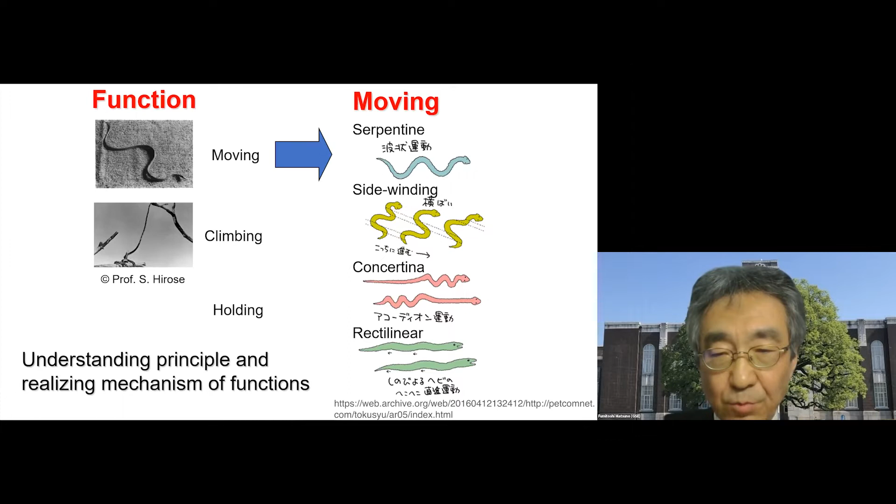Let us consider bio-inspired robotics. First, we consider snake locomotion. A biological question is why a snake can move without legs. Living snakes have many functions, not only moving, but also climbing, holding, and so on. In moving, it has many locomotion patterns, for example sidewinding, serpentine, and concertina. Understanding the principle and mechanism of these functions is very interesting.

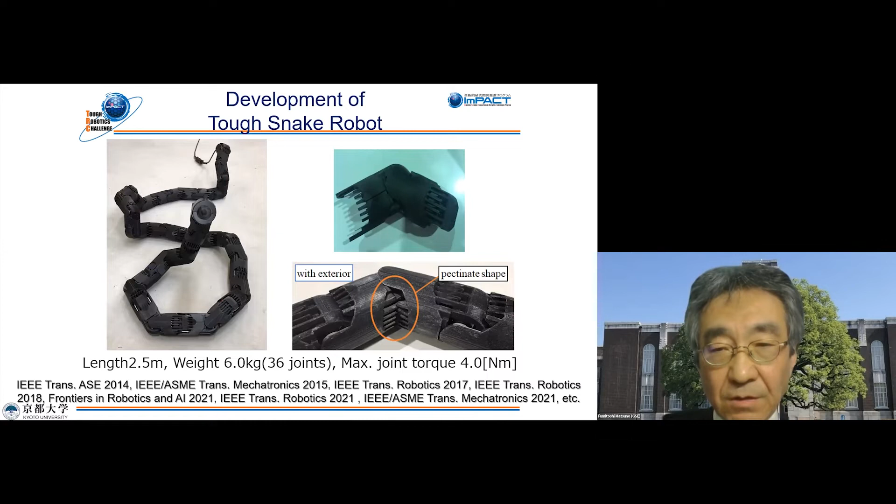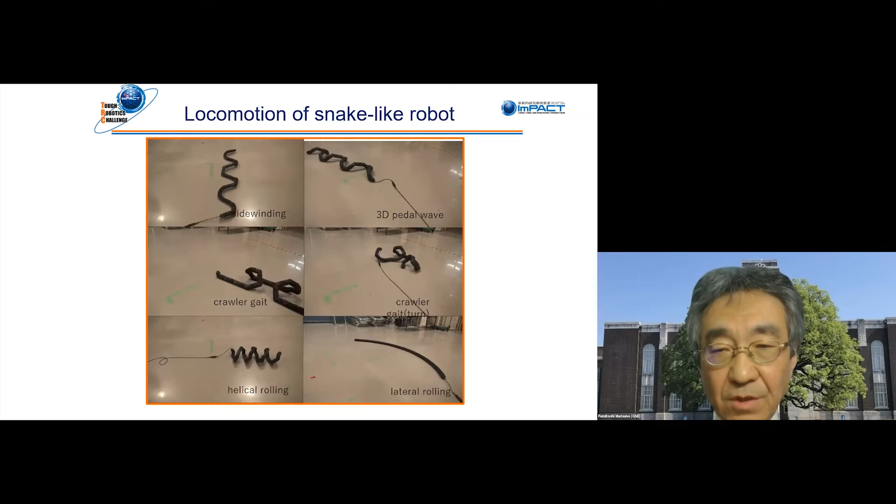We have developed some snake-like robots. This is a tough snake-like robot developed in 2019, and our developed robot has many locomotion modes. This is sidewinding, like a living sidewinder, and the other five locomotions shown in this slide are artificial motions that a living snake does not have.

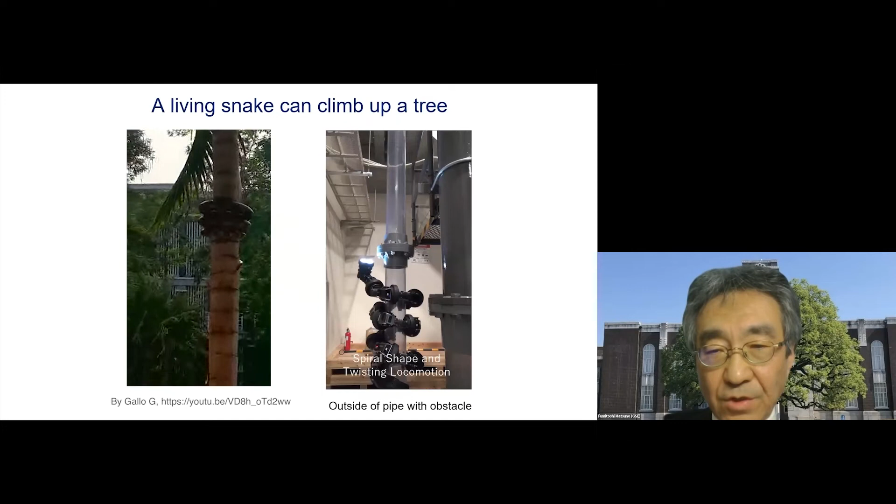You can find that a living snake can climb up a tree. It makes a fixed point at the tree, a part of its body is lifted up, and another fixed point is made. Inspired by this movement, we design climb-up motion by combining spiral shape and twisting motion.

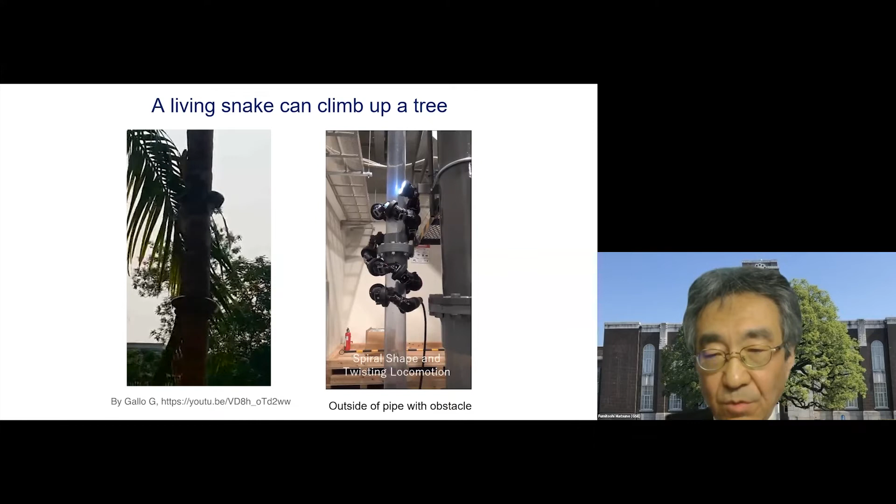Okay, we can apply a snake robot for pipe inspection. There are various types of pipe: junctions, bends, continuous diameter change, discontinuous diameter change, and shear blockage. We propose a unified approach for motion design of the snake robot, negotiating complicated pipe structures.

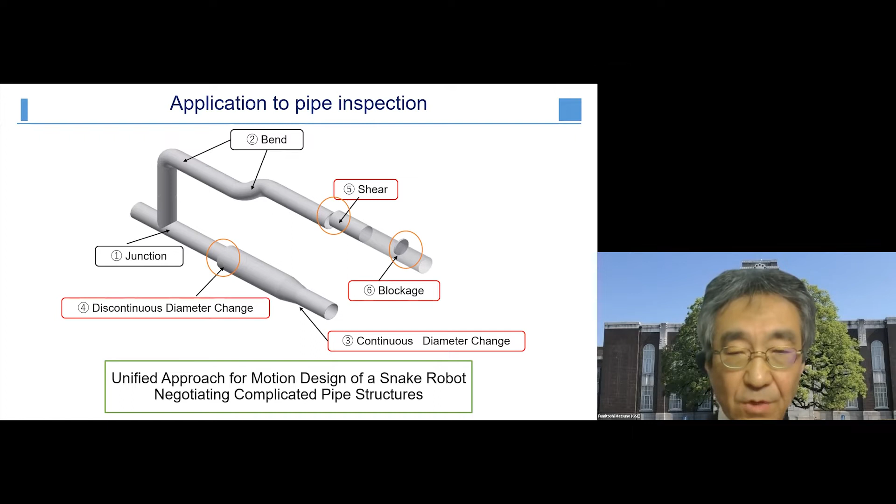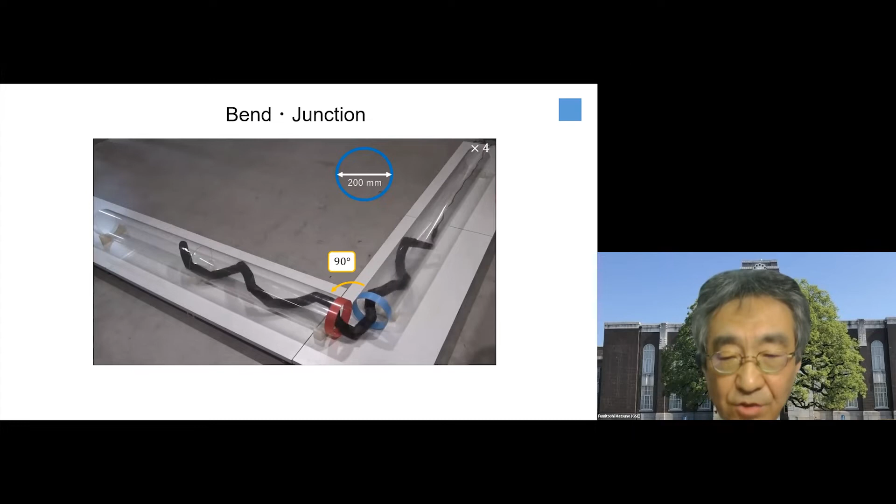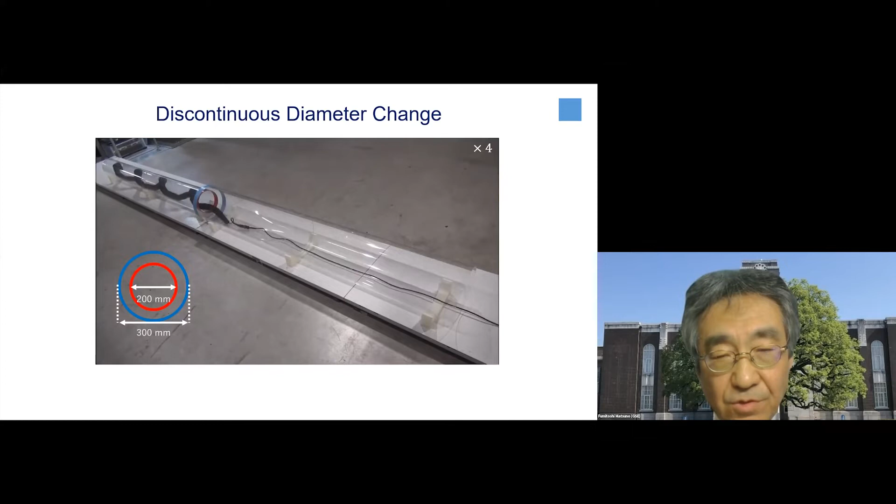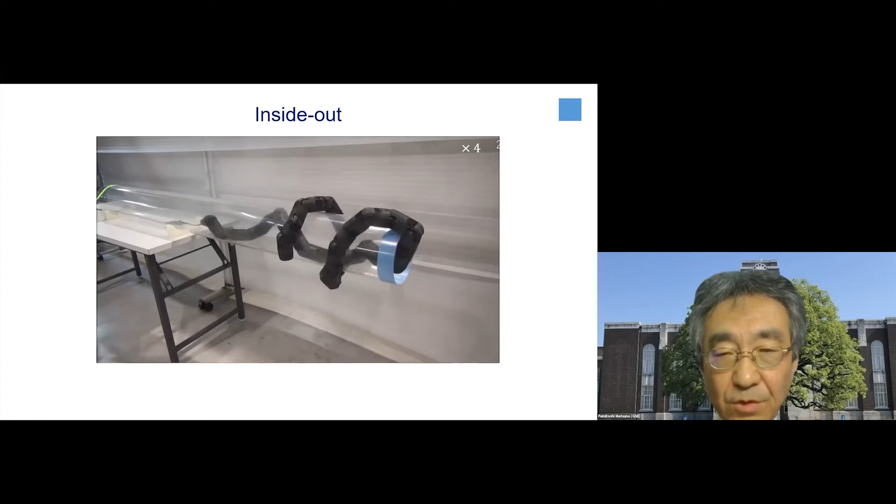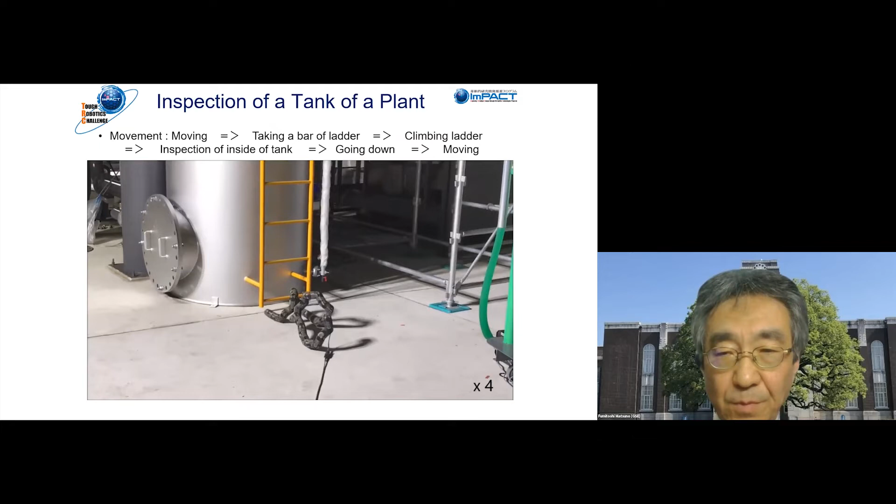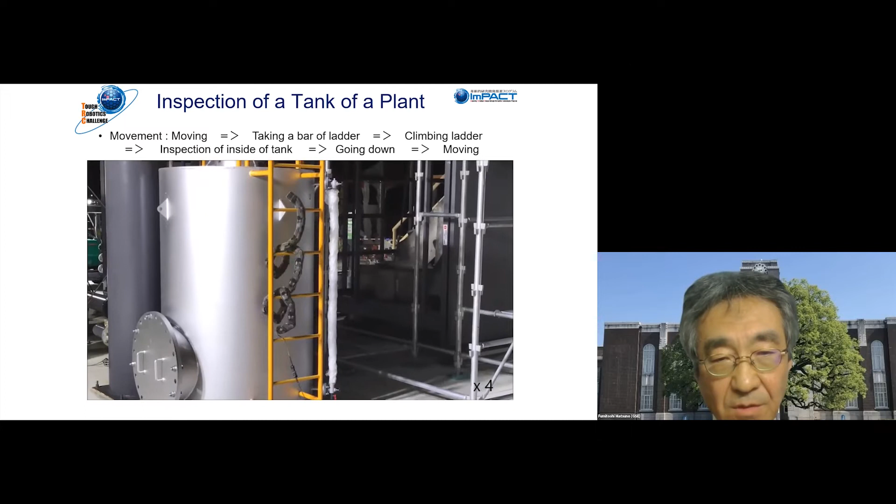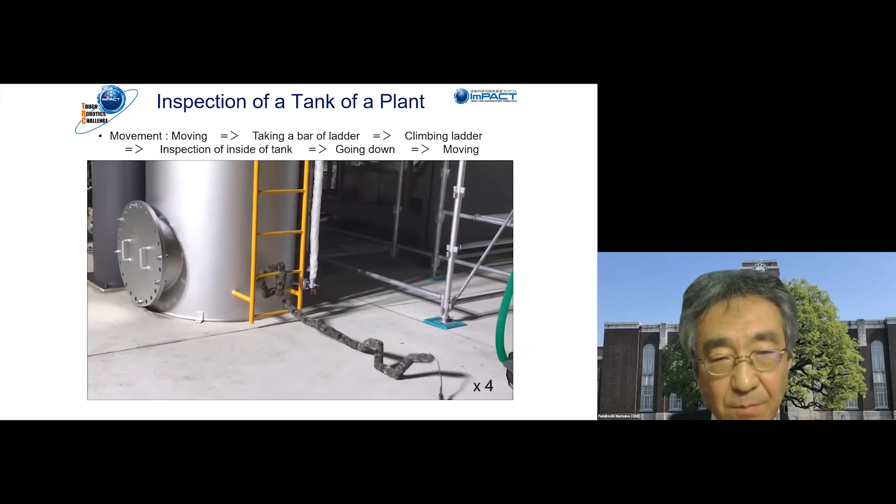Another application of the snake robot is the inspection of plants. This movie shows a demonstration of inspecting the inside of a plant tank. The robot climbs up the vertical ladder, and at its head, a CCD camera and other sensors are mounted. Using such sensors, this robot can collect information inside the tank. The robot then goes down the ladder, changing its shape from the climbing ladder shape to a crawler gait, allowing it to move like this.

Let us consider the number of legs of living things. Snake has no legs, humans have 2 legs, cats and dogs have 4 legs, insects have 6, octopus has 8, and squid has 10. So living things favor even numbers. But the robot is an artificial thing, so we can create a robot with an odd number of legs.

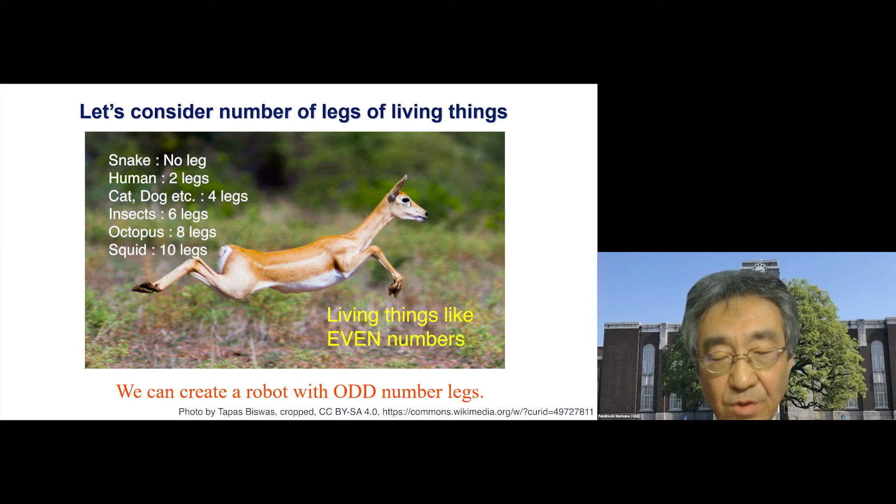Our final objective is not only understanding living things, but also going beyond living things. Currently, we developed a modular one-leg robot. There is no one-leg natural creature, so it is difficult to generate its locomotion intuitively. By applying our proposed learning method, the one-leg robot generates this kind of moving behavior.

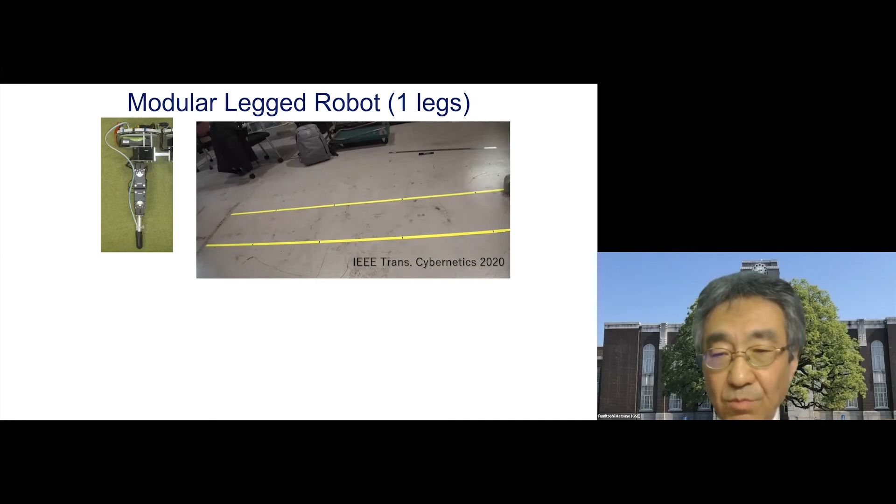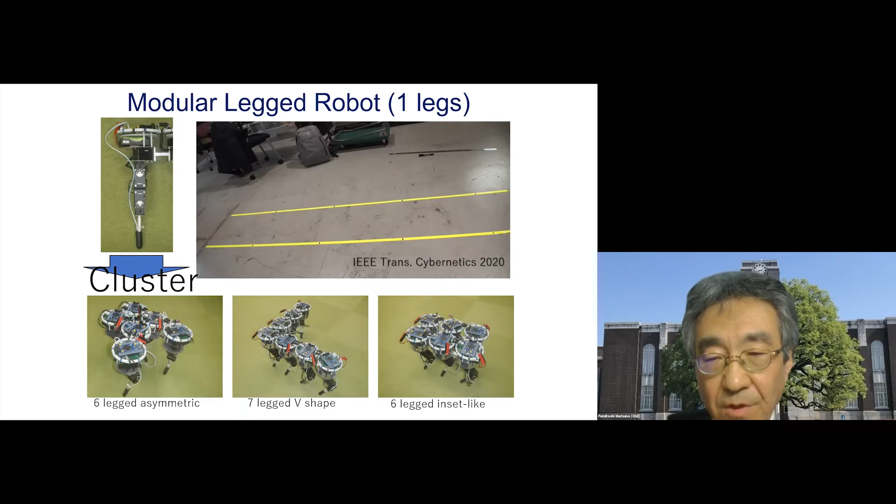The modules can connect to each other and create clusters with various configurations. For example, a 6-leg asymmetric cluster, a 7-leg V-shaped cluster, and a 6-leg insect-like cluster. We should design an autonomous distributed system for gait generation for one-legged modular robots connected in various configurations with any number of modules.

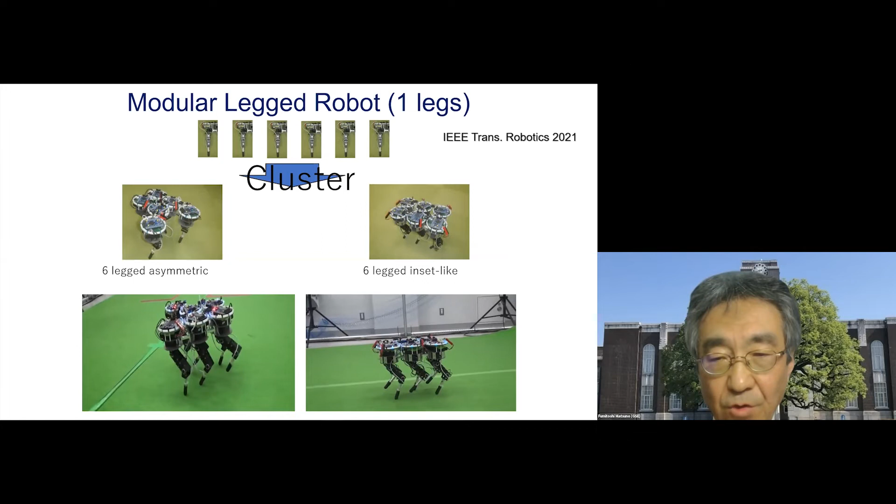This movie shows stable walking for the 6-leg asymmetric and insect-like clusters. Each walking gait converges to straight movement, and straight movement is achieved. In the case of the insect-like cluster, its walking pattern converges to the tripod gait, same as an insect. And in this case, the 7-leg V-shaped cluster realizes stable turning motion.

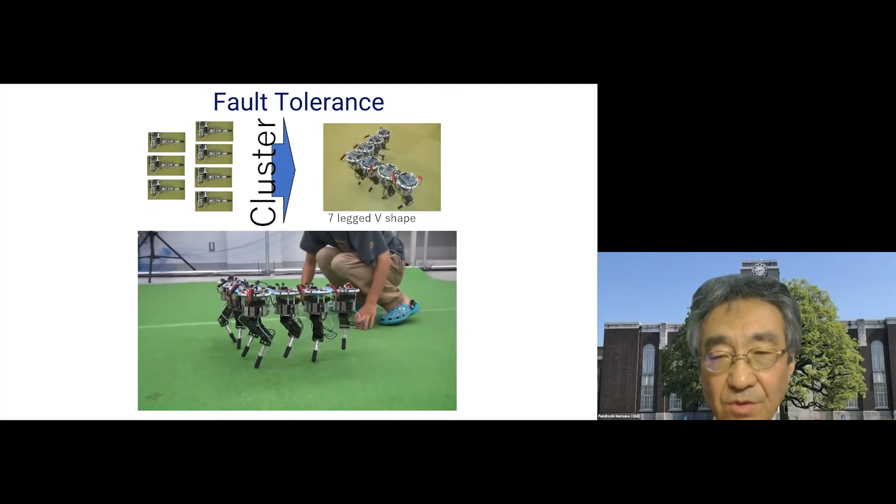After the walking gait converges, the signal lines of module 4, the central module, are cut. The cluster's gait pattern shifts to another pattern. This means that after a leg is broken, the cluster achieves stable walking again. We can conclude that our proposed autonomous distributed system is robust against leg malfunction.

Next, let us consider another biological question. How can ants communicate with each other? What is the decentralized control strategy of swarm behavior in social insects?

A modular robot, as shown in the previous slide, is a kind of swarm robot. This slide shows the experimental result for cooperative transportation using ant-like robots. The blue area is food and this area is the nest. An ant-like robot moves randomly to search for food. If it finds food, it tries to push the food to the nest. If the food is too heavy, it gathers other robots by putting pheromone on the environment from the food to the nest.

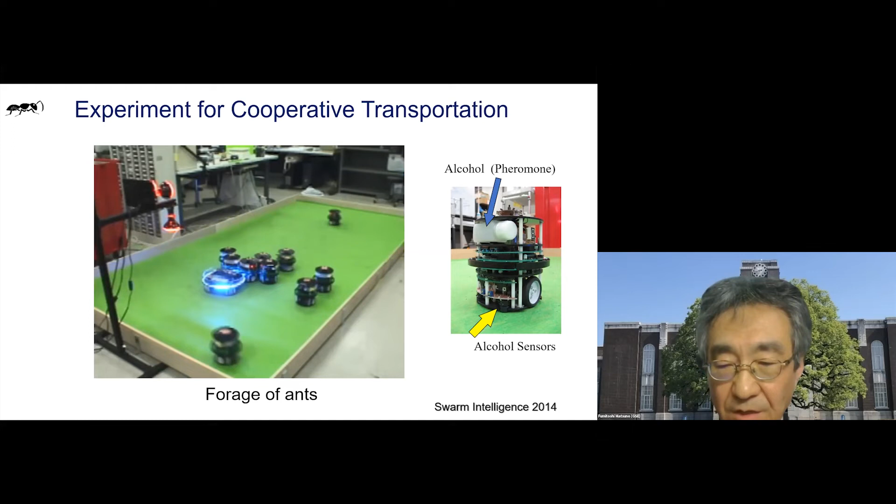I would like to introduce leader-follower navigation of swarm robots using a decentralized control strategy. Each robot has a sensing region. Only the leader knows the desired path. The followers do not know the desired path, nor which robot is the leader.

An agent receives attraction and repulsion forces from other agents within its sensing region. Also, a repulsion force is designed between an agent and an obstacle to avoid collision. This is a very simple control behavior based on the potential function.

Followers can avoid deadlock at the entrance of a narrow space and can follow the leader. As the leader approaches the entrance of the narrow space, the followers avoid deadlock and form a straight line formation. They pass through this narrow path area, and after passing through the exit of the narrow space, the formation changes to another shape from the straight line formation.

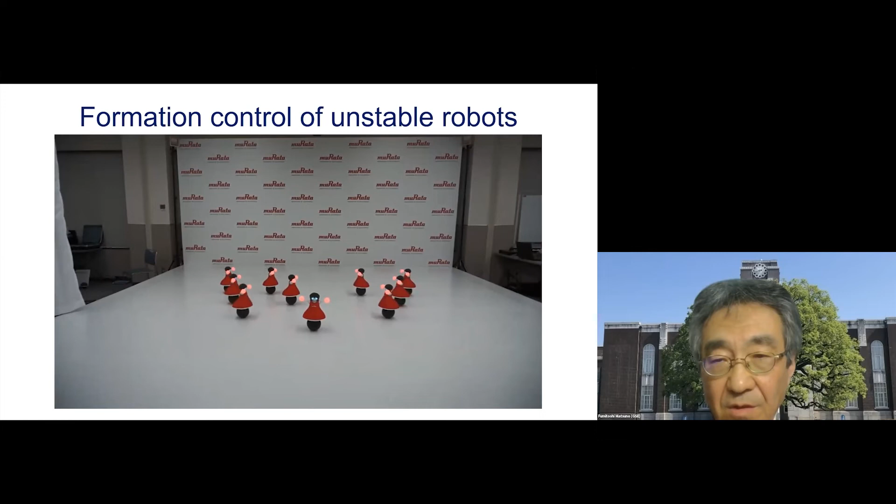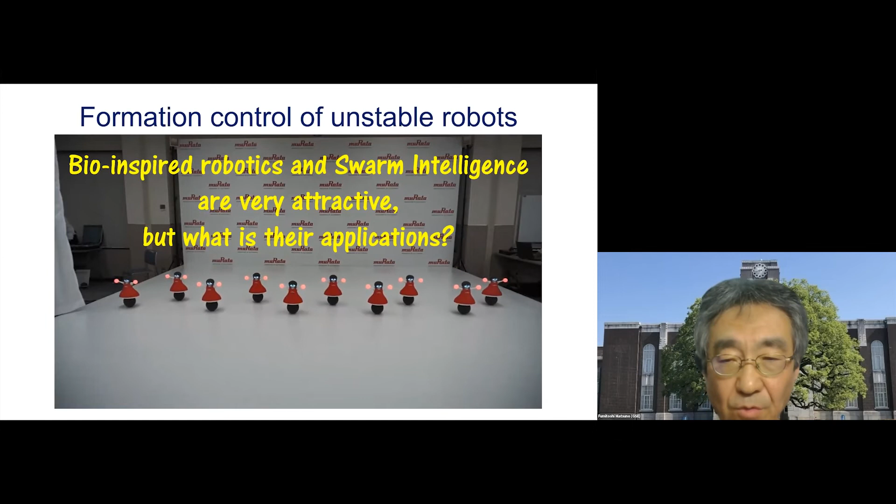Each robot should balance on a rolling ball and maintain formation. This is only entertainment, but bio-inspired robots and swarm intelligence are very attractive and interesting. But what is their application? It's very important from the engineering point of view.

We think the development of rescue robot systems is an application of bio-inspired robots and swarm intelligence. Based on experience from the Hanshin-Awaji earthquake in 1995, we have developed rescue robot systems.

In 2011, we had the Great East Japan earthquake. We visited the disaster site with our developed rescue robot. As you know, the Great East Japan earthquake was a complex disaster caused not only by earthquake and tsunami, but also the Fukushima nuclear power plant accident. Humans cannot enter the damaged building at Fukushima, so robots and robot technologies should be used.

In 2018, we applied a snake robot and crawler robot at the landslide disaster site at Okayama. Toughness is very important for disaster response robot systems. The robustness and flexibility of social insects and living things are good hints for the toughness of disaster response robot systems.

Okay, so next we will consider what is a robot. Please answer the following question. If your answer is yes, you can use the reaction function and please raise your hand.

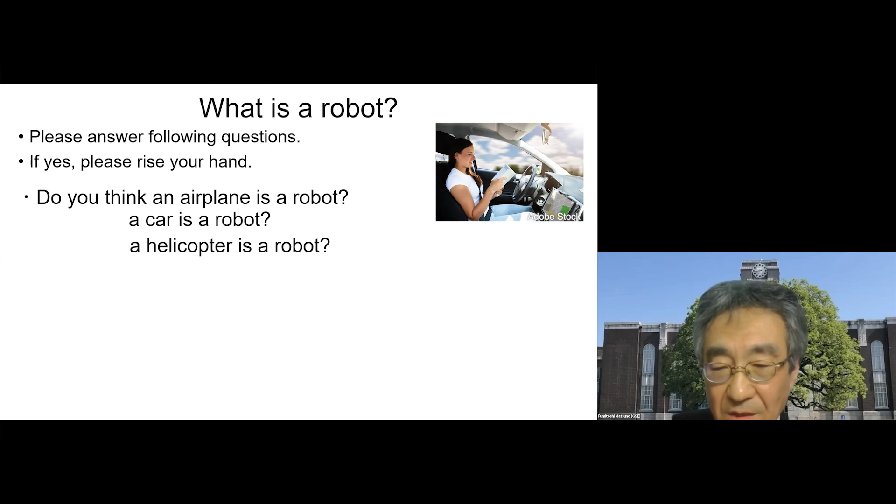Next, do you think a helicopter is a robot? Not so many people agree. So, this is the Yamaha R-Max, an autonomous helicopter.

And do you think a Roomba is a robot? I guess many audience members raised their hand. So what is the difference between a robot and the others? Maybe the Roomba is a robot and the others are not.

What is the current style of a cleaner? This is a cleaner. The Roomba is completely different from the current cleaner. It is curious and has no name, so we call the Roomba a cleaning robot.

In Japanese, osoji robot. If Roombas are widely used for more than, say, 10 years, the word 'robot' will disappear and we'll just call it a cleaner. As long as the word 'robot' is added, it is curious and not an actual convenient tool for us. If the word 'robot' disappears, it is evidence that it is truly useful for humans.

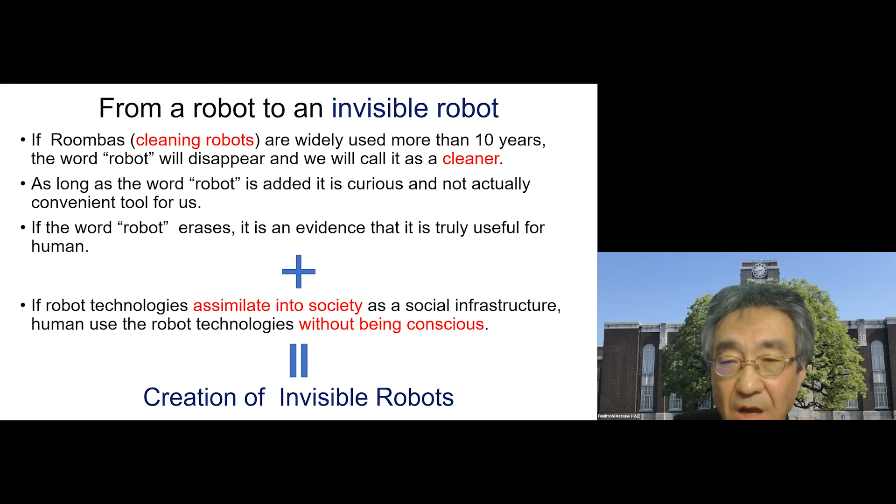I think if robot technology assimilates into society as a social infrastructure, humans will use robot technology without being conscious of it. So I say that I would like to create invisible robots.

In the first part of this talk, I said we should make a bridge between understanding of nature and engineering application. Based on understanding of living things, we can create useful robots for humans and beyond living things. But I think it is not sufficient.

Currently, the COVID-19 pandemic is a very serious problem for humans in the world. People say we should coexist with viruses. I'd like to explain the concept of deep ecology.

This deep ecology platform by Naess and Sessions in 1984 is very significant: the well-being and flourishing of human and non-human life on Earth have value in themselves. These values are independent of the usefulness of the non-human world for human purposes. Humans have no right to reduce this richness and diversity. Present human interference with the non-human world is excessive, and the situation is rapidly worsening.